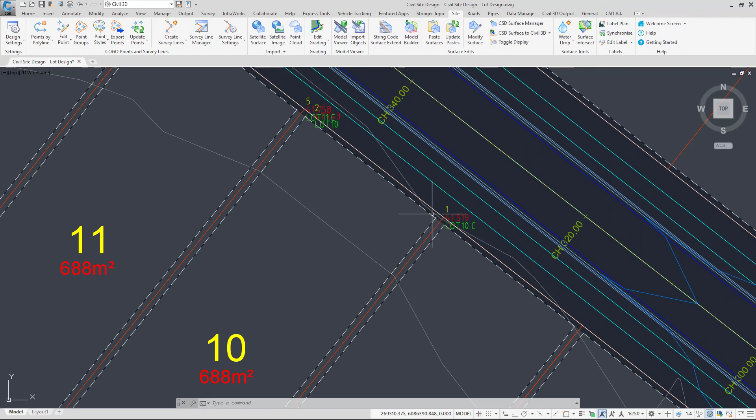So the points that we've created are dynamic blocks, which means that we can use some of the grips available to manage the position. So as you can see here, I'm able to very quickly just grab this particular grip and reposition the labeling. I'm also able to flip the labeling, as you can see here, and have the label positioned at a location of my choice.

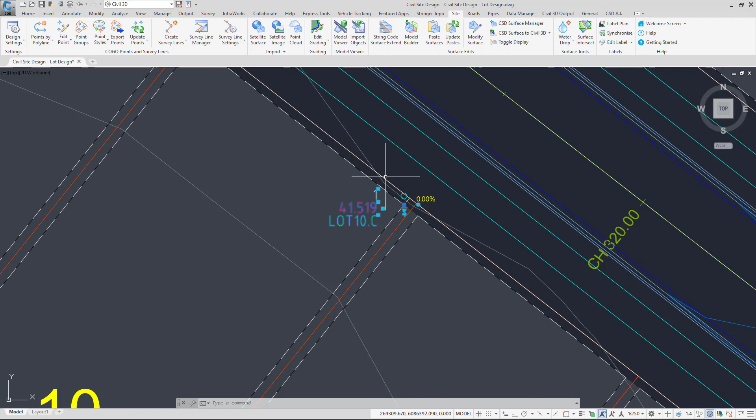In addition, we also have what's known as a hover grip. So when we select the block, you can see I'm able to hover over this circle. This allows me to access content about this point. What I like to do is to check the dynamic positioning of this point, which is what was assigned when we created it. I can do that by clicking on Set Dynamic Position.

In the form, you can see that we're able to not only change the vertical position of the point, but also the horizontal position of the point. Now, when we are creating points by polyline, it's important that we always make sure they are assigned to a 2D polyline. We're able to actually change the chainage or the vertex, if we choose, of the location of that point. Underneath, we can then choose whether or not the reference string code option needs to be edited.

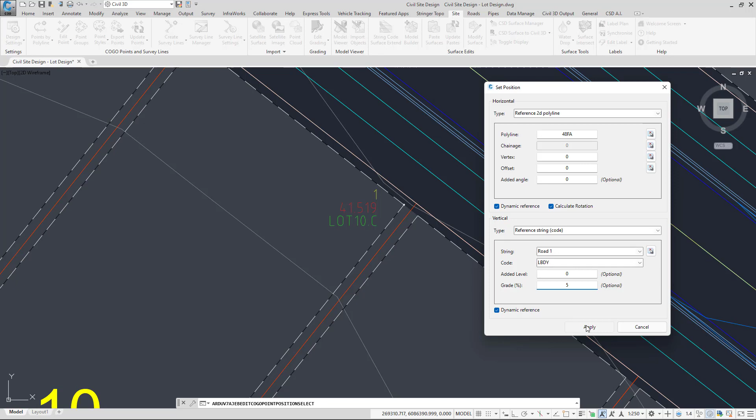Now in this case, you can see here I'm picking up road 1, I've got the grade of 0.00%. Now I may decide that needs to be 5%. So at this point I can click apply. That elevation has now been updated. The point at the rear, as you can see, is actually connected to the point at the front. So let's have a look at how this has happened.

We're going to zoom down onto the point, hover over the grip, set dynamic position. You can see here how the point has been assigned to vertex 3 of our polyline. However, the vertical design is using reference COGO point. So what you're able to do is to create points in the drawing that reference other COGO points, meaning that if those reference points change, your point will also update.

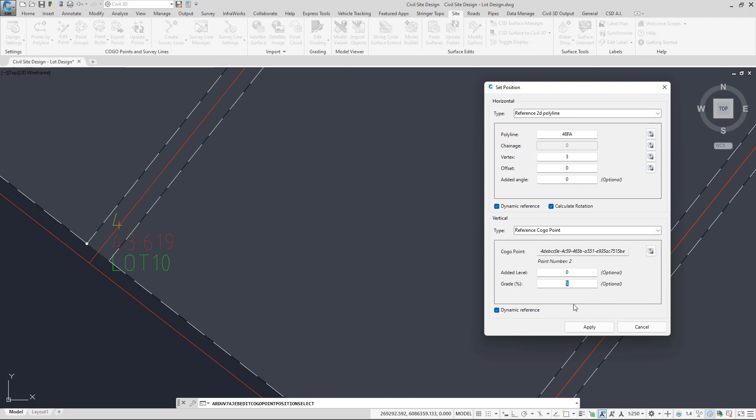So you can see here, reference COGO point. The COGO point is referencing point 1, which is at the frontage and is 5% above. We could change this, so I can go ahead, click on the picker tool, and decide, well, in actual fact, we need to be 5% above this point here, which is point 2. Press enter, and be again 5% above. We can click apply. That elevation will update, and when we select the point, you can see there that the reference has changed.

Now we could change that to be string code, so we could decide that we want to be 5% above the lot boundary code, not necessarily above this particular COGO point. But you can see how very quickly and easily it is to access the point information and change and update the position of those points.

If we wanted to, we can also use the Edit Point button found on the panel here. So if we click on Edit Point and then select our point from the drawing and press enter, we'll be prompted with this form. Now the dynamic positioning is all done through this particular button here. So we click on Setup Position and you can go in and manage the position this way.

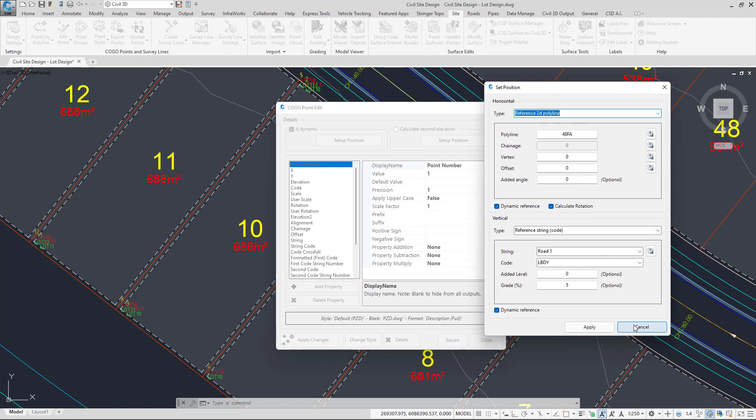If you wanted to, for example, manually override the elevation by unchecking this box, you can actually type it in yourself. If you wanted to update the code, maybe you decided that it should be a different lot number, you could go in and type that in here. All of these are editable, so you can go in and make changes to these as you wish, and the point will update to suit.

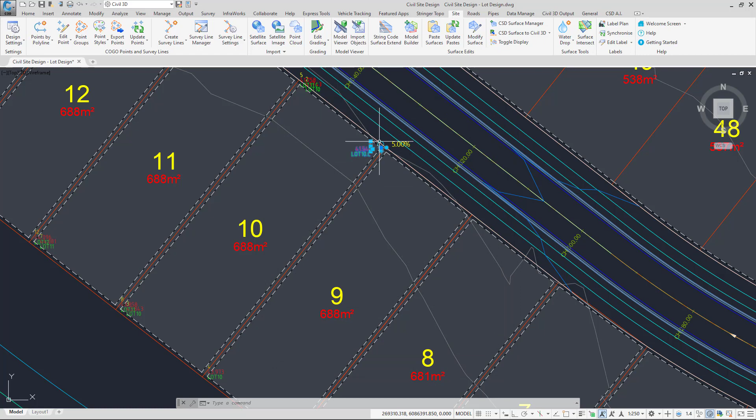We click on Apply Changes and then close. That same form is also available via the hover grip, so you can go Edit COGO Point and get access to that particular point.